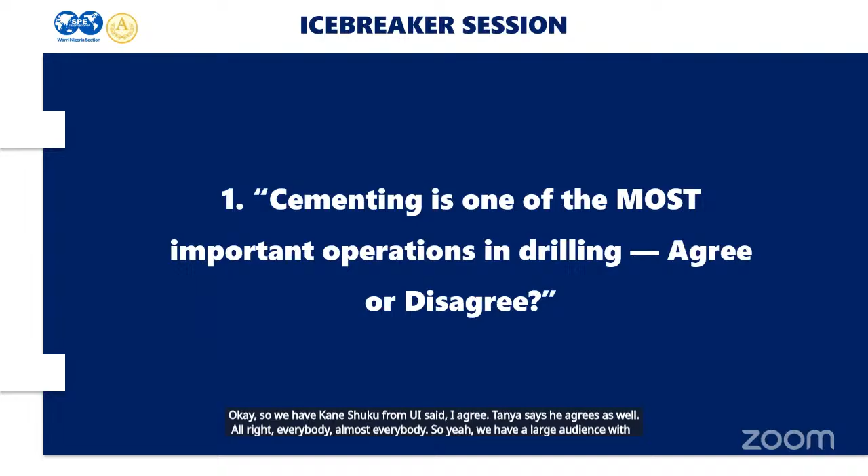Our first question: cementing is one of the most important operations in drilling, yes or no? Do you agree or disagree? Okay, we have Kene Shuku from UI saying I agree, Daniel agrees as well, and almost everybody is agreeing. So we have a large audience with the agreeing button. Let's move on to the next question.

The next question: how long do you think a cement job takes in real life? This is something I've not really thought about, probably because I've not been there. Do you think 30 minutes, 2 days, 3 days, 1 week, a month? Let me get your opinions. Nobody's responding, you're quite slow. All right, somebody said 2 days max. Daniel says less than a week, depending on the hole section. Similane said 1 and more. Better said 2 to 3 days. All right, it's like people have been on the field before, but that's fine. Let's move over to the next question.

Our third question, we have two options and you have to pick which one scares you more: cement job failure or a blowout. Earlier, Miss FJ was talking about the Deepwater Horizon incident, which was caused by a blowout. Somebody said blowout, and Callisto said A, cement job failure. Interesting that cement job failure is the one that scares you more, maybe there's something to it. We'll find out in this session. Let's move on to the next question.

All right. Good evening, everyone. I'm really excited to be here with you guys. I will just run through fundamentals of cementing from theory to field application. My learning objective for this presentation is very simple. Since we are talking about fundamentals of cement, everything I'm going to be saying will be limited to primary cementing operation, from pilot test in the lab straight to operations on the rig site. I believe you guys will gain value from this presentation.

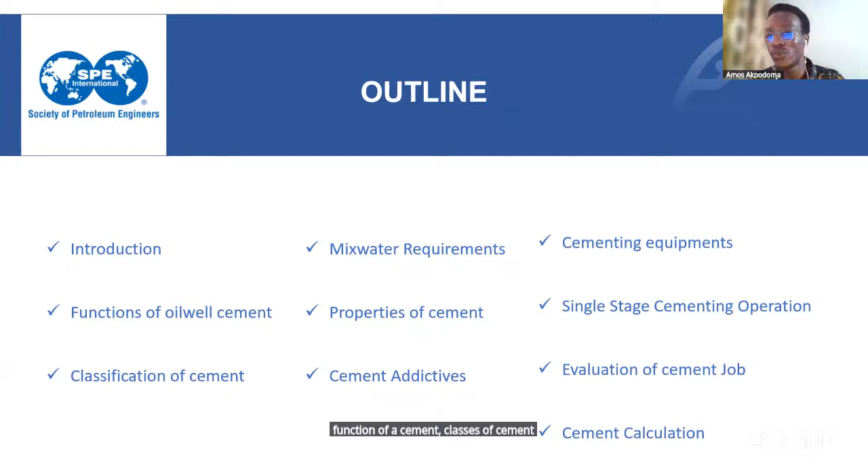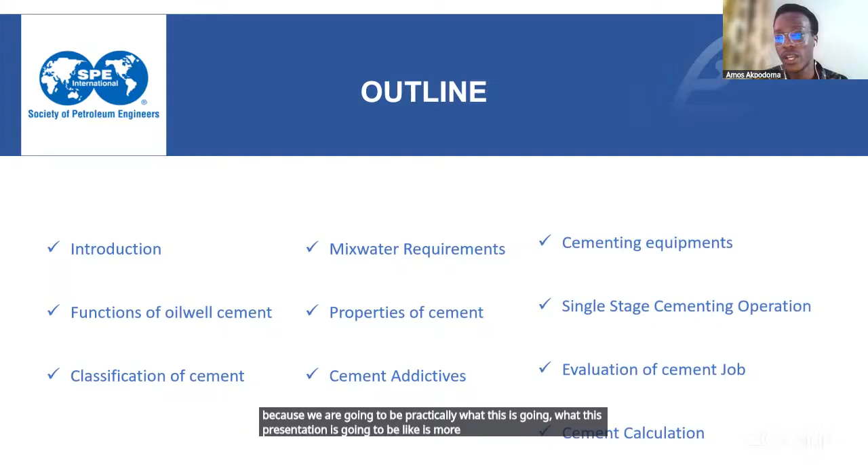So here's my outline for this presentation. I'll take you through introduction, function of cement, classes of cement, and then wrap it up with cementing calculations. I believe most people on this call are students, so please get your calculator handy. When we get to the calculation we'll do a little exercise, since this presentation is designed more like engineers designing slurry for a cementing operation.

So, what is a cement? I can't really see the chat box. Can someone unmute themselves and tell me what a cement is, please?

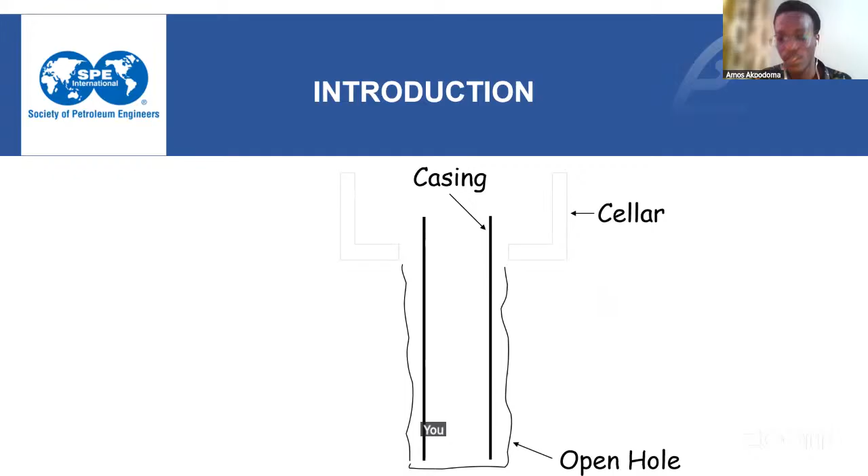So after running your casing, what's next? You cement. So these three things I just showed you - the drilling for the open hole, then the casing, and cementing - is practically the description of everything we do on the well site. The other things that come in are probably formation evaluation; you want to evaluate the hole you've drilled, complete them, and all of that. But basically what you do in drilling is you drill, you case, and you cement, and that is all in drilling.

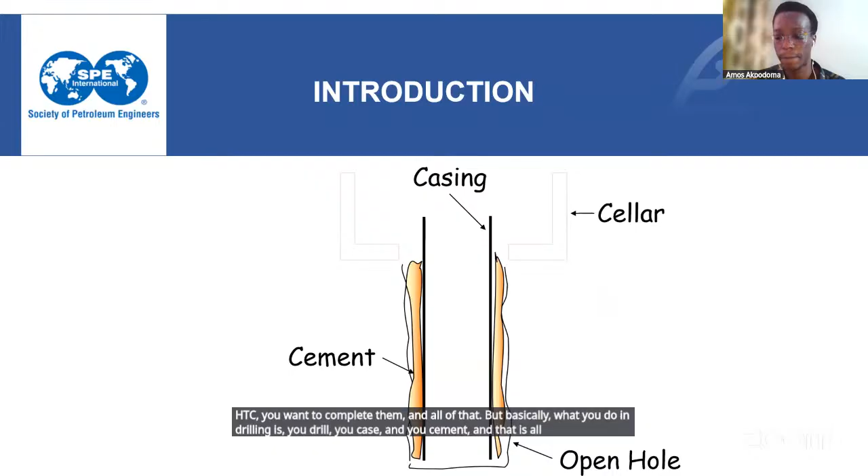So I think this falls back to our question on the icebreaker. The question was asked: what do you fear the most, a poor cement job or a blowout?

Are you guys still with me? Yes, sir, we can hear you.

All right, okay. So basically, this is what cement is. A cement is used primarily as an impermeable seal material in oil and gas well drilling. So basically, like the schematic I showed earlier, one of the most widely used applications of cement is actually to bond the casing to the formation. It's that simple. I'm trying to be as simple as possible in my explanation.

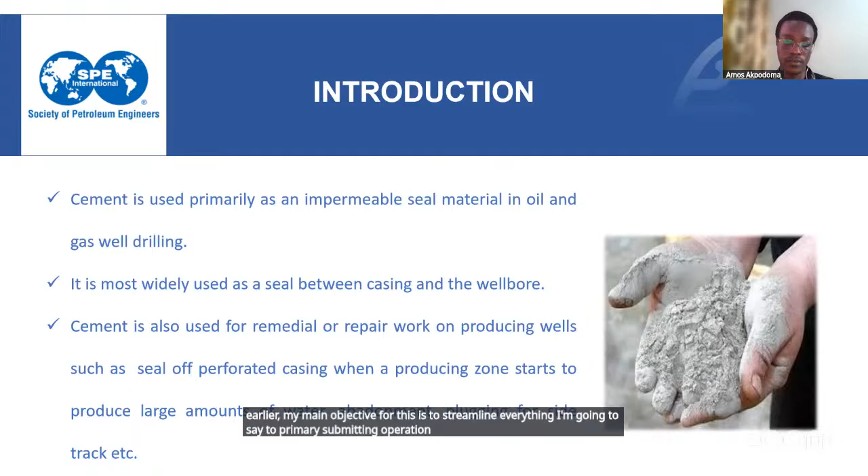The most important function of a cement is not actually to prevent caving in, like we all learn in school - caving in, isolate, hold the casing and all of that. That's not the, should I use the word, primary function of a cement. We should know this as a rule of thumb. The primary function of a cement is to actually restrict fluid movement between formations. You don't want a cross flow of fluid in your formation. This can lead to channeling, blowout, etc. So that's just the major, primary function of cementing.

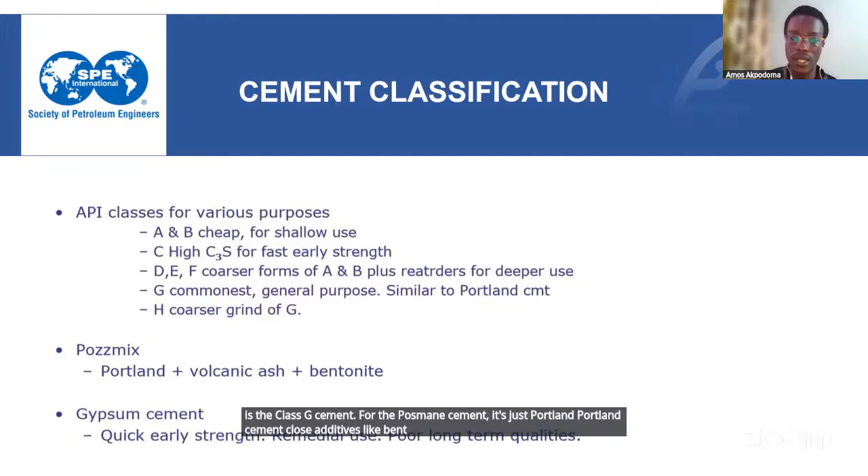All right, so we'll be moving to the cement slurry, how cement slurries are actually designed. First off, we already know what a cement is already, like Daniel helped us to define. We already know a cement is just a fine particle made from limestone, shale, what not.

So how do we design a cement slurry? First off, I said we already picked the type of cement we are going to use, which is class G, that's the most common cement. So if we are designing a cement slurry, we already know we're picking a class G API standard cement.

So first off, we'll be talking about the mixed water, the cement mixed water. So what is cement mixed water? It's already here, so mixed water is the water that is used to make up the cement. It's more like, I think it's self-explanatory. If you want to mold a block, the water you use to prepare your cement, make your cement, mix your cement, that is the mixed water.

There's no big English to it. That's why I said drilling engineering is one of the simplest forms of petroleum engineering. It's one of the simplest disciplines in petroleum engineering.

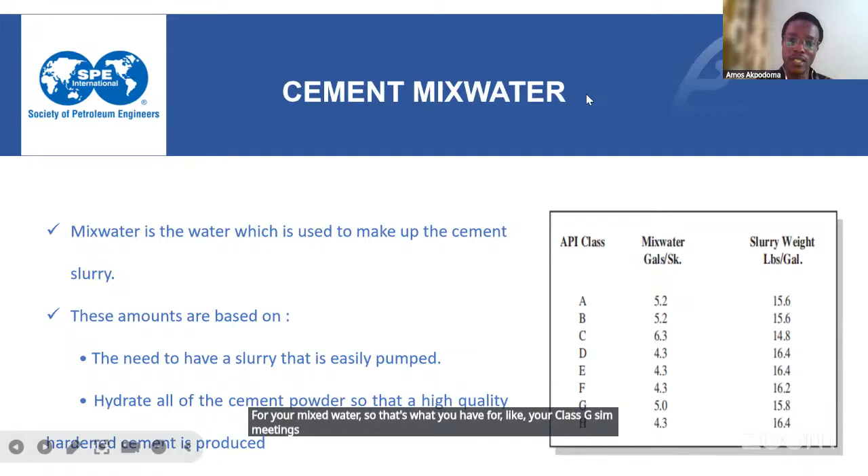So moving on, still on the mixed water, the amount of mixed water used to make up the cement slurry is carefully controlled. Like I said earlier, you want to design a cement slurry that you can easily pump and that won't set in while you are pumping. So it says that if the mixed water is too much, your cement will not set very strong.

Like for those of us that have experience with or have seen people molding blocks, if there's too much water in your cement mixture with your sand and all of that, you will not have a very solid block.

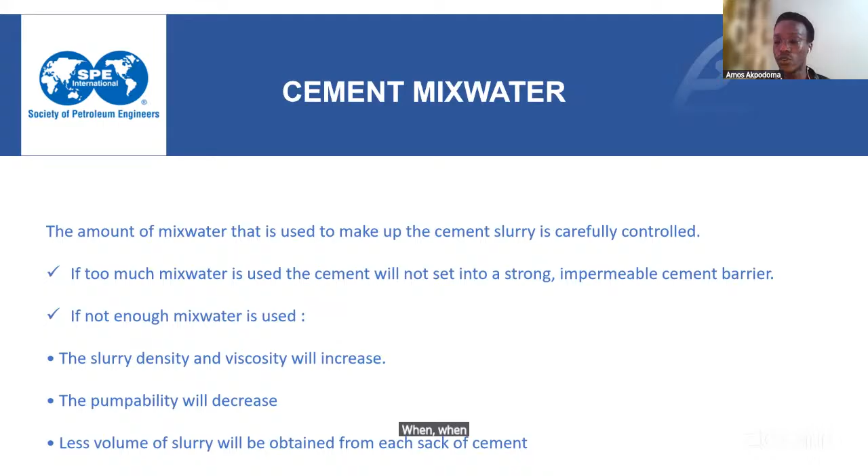And if you do not put enough water for the cement slurry, you see the cement density will be high. It's more like when you don't have enough water for block molding, the thickness will be very high because density is more like the thickness now. And if your density is so high, you cannot pump it. So you have to be very, very careful when mixing your cement slurry with your mixed water.

All right, a minute. I want to bring in a fluid engineer that works in a lab and understands the properties of cement, what they measure in the lab. I want to bring her in to talk about the properties of cement for a while, then I will continue after she's done. Please, Oghenefejiro Golagha, if you're on the call, please go ahead and give a breakdown of how cement comes into your lab, the kind of tests you guys run, just for the students to understand the properties we look for in a cement slurry.

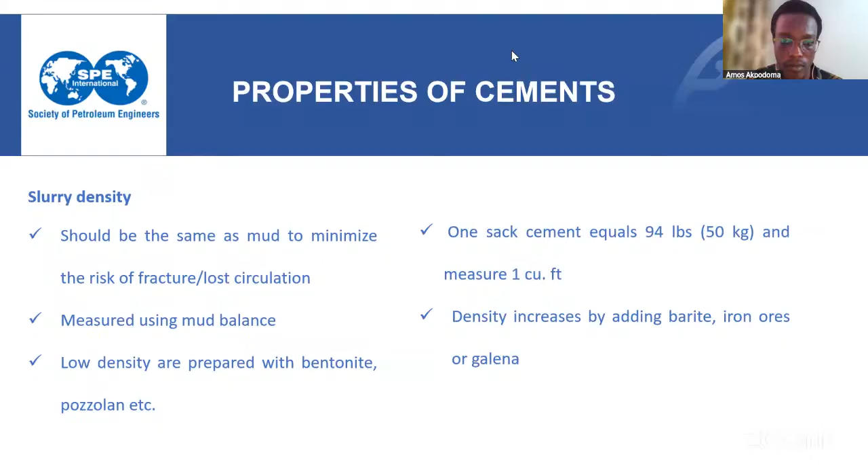Okay, good evening, everyone. Please confirm you can hear me.

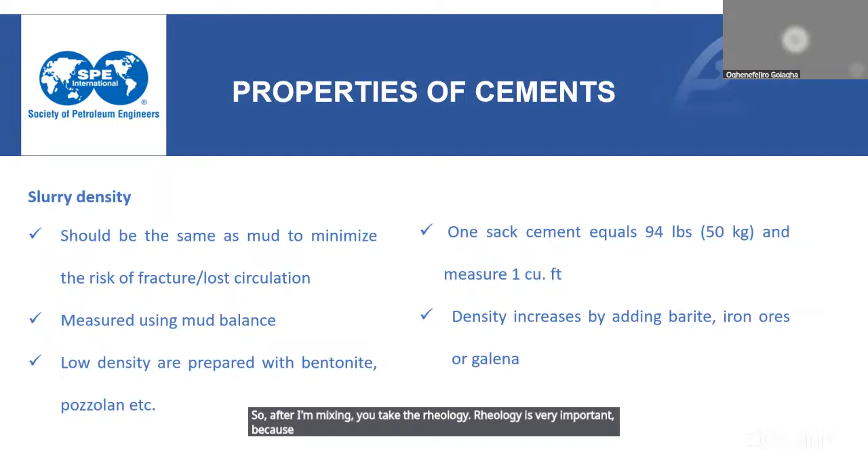After mixing, you take the rheology. Rheology is very important because if you don't know the properties of your fluid in terms of its plastic viscosity, in terms of yield point, how long this cement can withhold - one of the properties I'm trying to compare it to is drilling fluid.

One property of drilling fluid, which is the mud, is to bring cuttings to the surface and also to hold cuttings in terms of, let's say, a changeover at the rig. It's the same thing the slurry is doing. So the slurry should be good in terms of rheological properties, in terms of gel strength, because once you're pumping and at a point you need to stop, will the cement be able to bounce back by the time you resume pumping?

By the time you put on your pump, will the cement still be able to pump? So after mixing, you take the rheology. After the rheology, if you notice that the density of the slurry is too viscous to flow, you redesign again to make sure that the slurry is pumpable. We don't want to pump slurry where the pump will be cavitating or going through a lot of stress to pump a job.

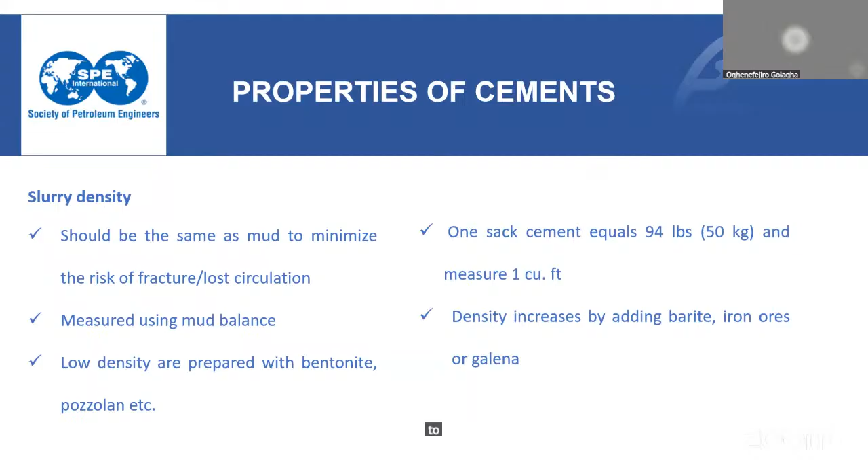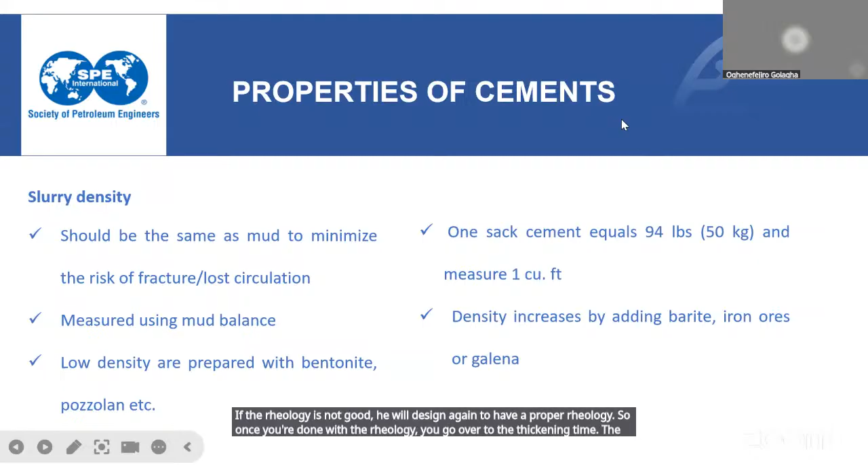Like I'm doing a flow chart - if the rheology is not good, they redesign again to have a proper rheology. Once you're done with the rheology, you go over to the thickening time. The thickening time is one of the most paramount tests we run in a cement job because we want to know how much time it will take for the cement to set.

We don't want to be pumping a job and all of a sudden notice that the pressure is building up, observing that the cement has set in your casing. Cement slurry is supposed not to set in your casing - it's supposed to set in the annulus between the casing and the wellbore. So any cement job where the cement sets inside the casing's inner diameter means you must have gotten a CLIP - cement left in pipe.

And that will lead to a lot of issues. You may want to look for how to break that cement before you continue your job, or you now have to do a remedial job by plugging that well. Then finally, the thickening time, like I said, is to know when it will stop pumping.

And we measure that in Bearden units of consistency, known as the BC. So for a tail slurry, it's higher in density with a lot of cement quantity, usually 70 BC and above. While a lead slurry is lighter in density and also in terms of cement concentration, it's about the POD, point of departure.

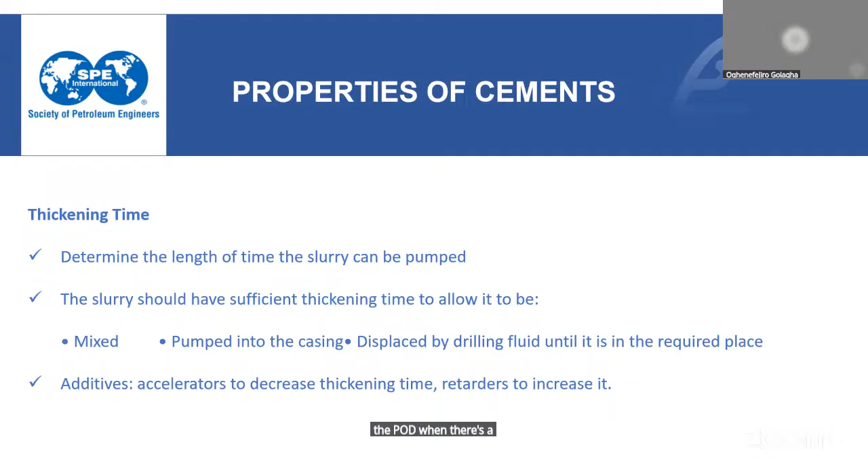After the thickening time, you may want to do compressive strength testing, and the compressive strength tells you how much that cement can withhold stress. It's usually 50 to 500 psi and also above 500 psi. So a good cement slurry should give you a reasonable compressive strength within 24 hours.

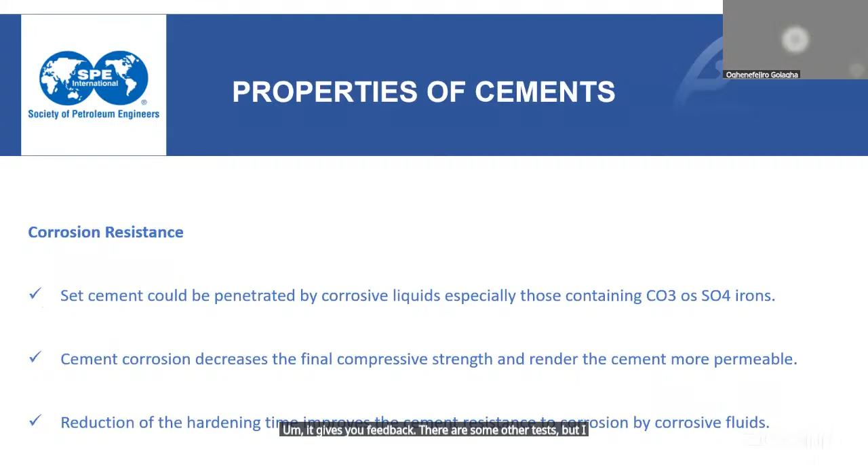And finally, you share your results with your client. If the client is okay with it, they give you feedback. There are some other tests, but I will not go into details. If it's not okay, you redesign and start the process all over again. At this point, thank you very much.

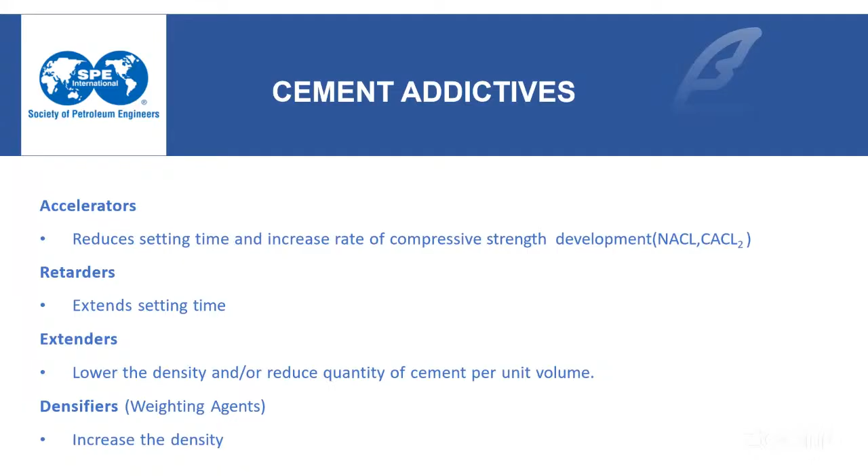All right, so Golagha just did justice to what happens in the lab. After all these designs are done, your additives - these are some of your additives. For knowledge sake, you have your accelerator, your retarder, extender, densifier. I'm just trying to rush this presentation. So for your accelerator, just know your accelerators reduce the setting time.

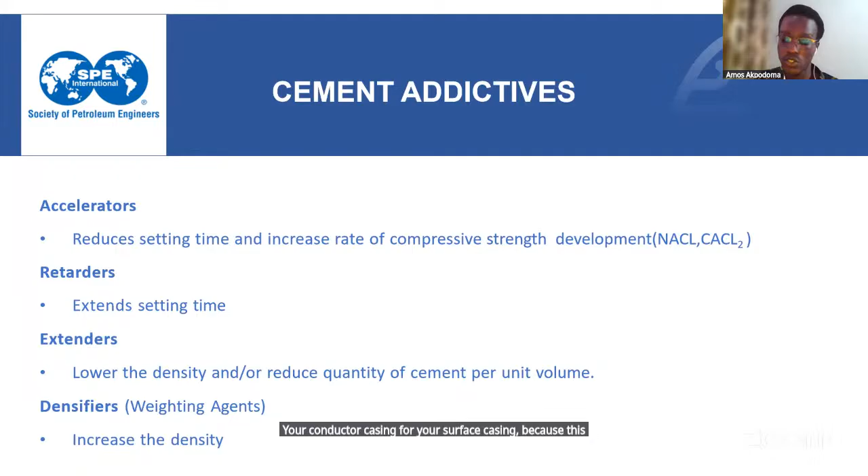For your retarders, they extend the setting time. So most times for the accelerators on the field, you add accelerators to your cement slurry for your conductor casing, for your surface casing, because these casings, this whole section, they are not deep, they are shallow hole. So temperature is not usually very high there. But for deeper wells with higher temperature, you want to add additives such as retarders and all of that. So extenders is just for you to reduce your density of your slurry.

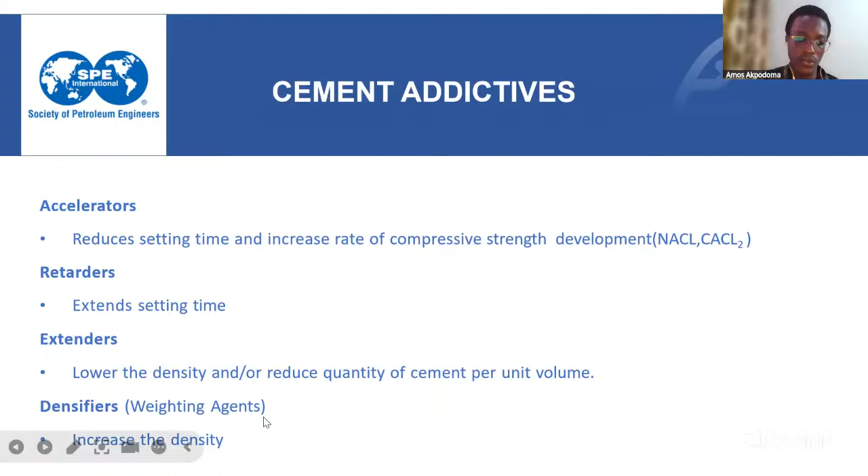You can use your slurry - for this, most of the time you use a barite. So you have your dispersant and other additives such as the defoamers to remove foams and gas bubbles, LCM for loss circulation and all of that.

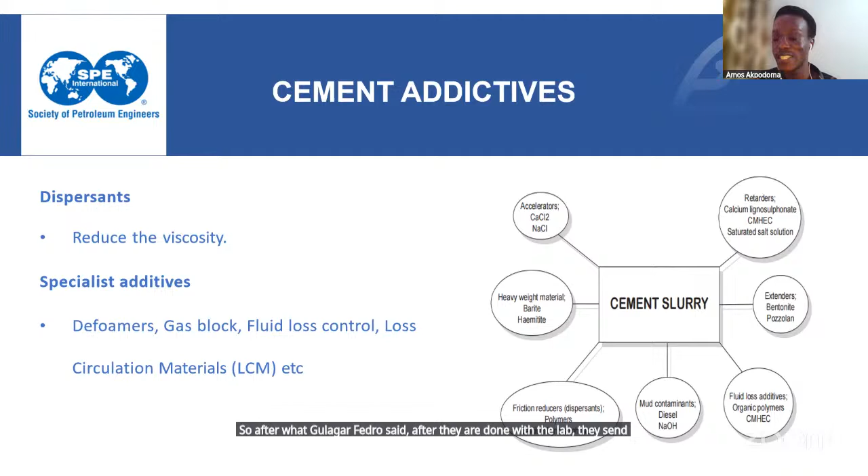So basically this is cement slurry. This is what your cement slurry will look like. Your cement slurry is your cement plus your mixed water plus your additives. So after, like what Golagha Fejiro said, after they are done with the lab, they send this cement to us as a blend in the well site, and this is where we actually come in.

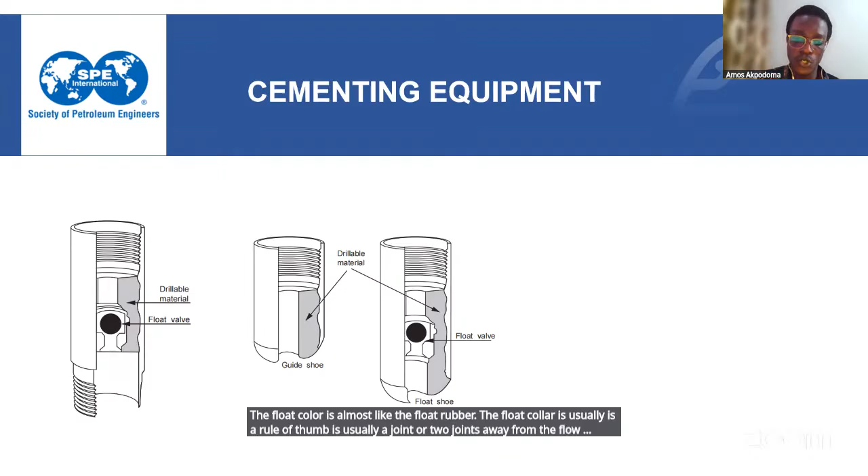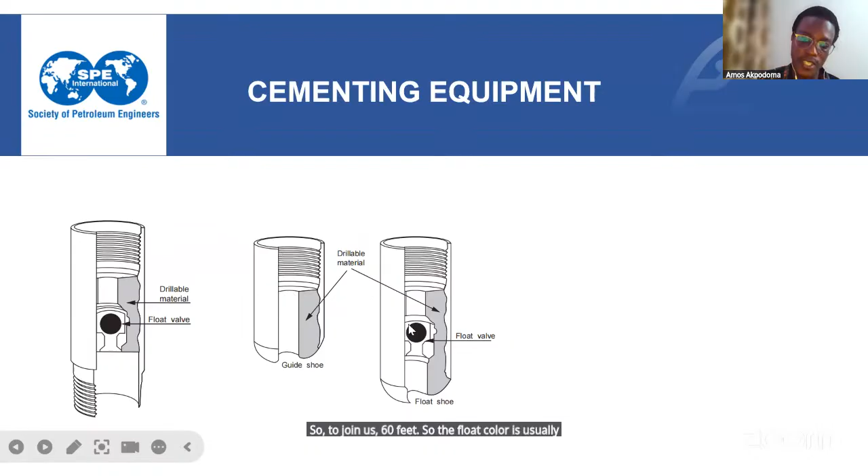We also have, okay, if you can see this diagram here, this is a representation of what it looks like in the wellbore when your casing and your cementing accessories are already in the wellbore.

So this first one here, if you can see my console, this is the guide shoe, or the float shoe. Most of the time in my own experience, we have always been using the float shoe. The distance between this float shoe and the float collar is what we call the shoe joint.

So you should know your casing, your slurry that you are designing in the lab that you are taking to the rig site, is going to fill your annulus and your shoe track. So you should know that your cement is going to be first in your annulus, and then a part of it will also be in your shoe track.

So this is the float collar here. These are bottom plug, our top plug. This you are seeing here is a centralizer. I think I have a photo of the centralizer.

So these are our plug, top and bottom plug. Our top plug is a solid core, solid from the top to the bottom. While for the bottom plug, it has a hole, and then a disc. This disc can be ruptured with pressure. When you apply pressure, that disc can break. I will explain the sequence later in this presentation.

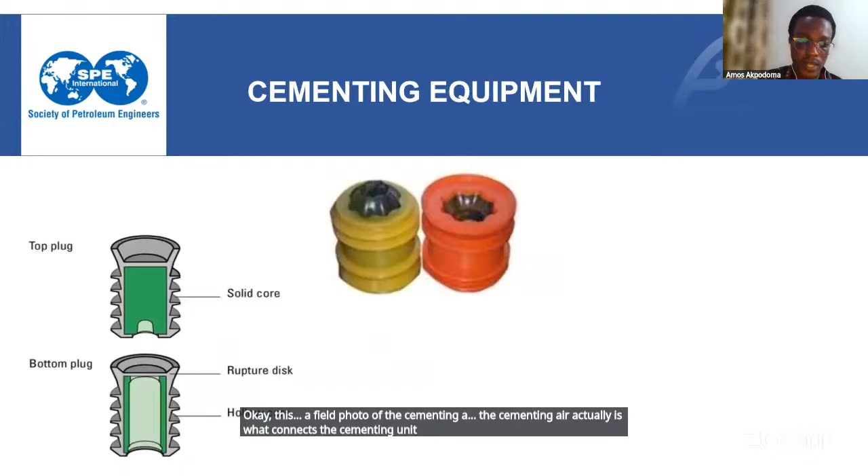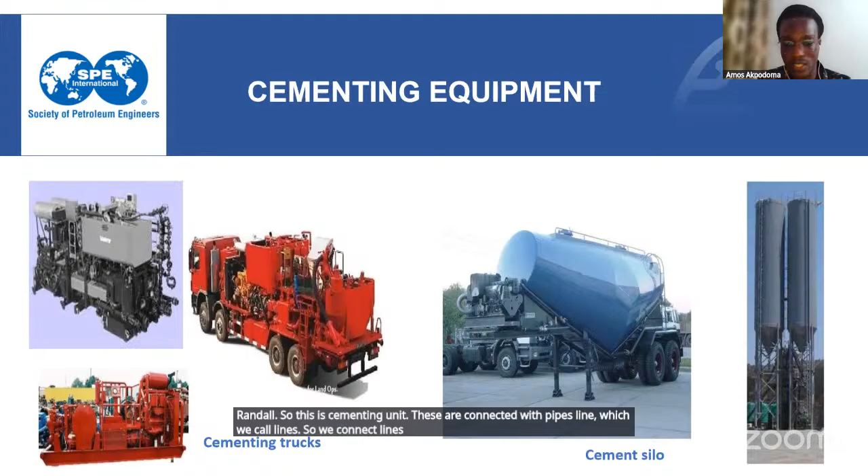To the cementing head. And also our plugs, our top and bottom plug, are usually secured in the cementing head. I will explain the sequence later.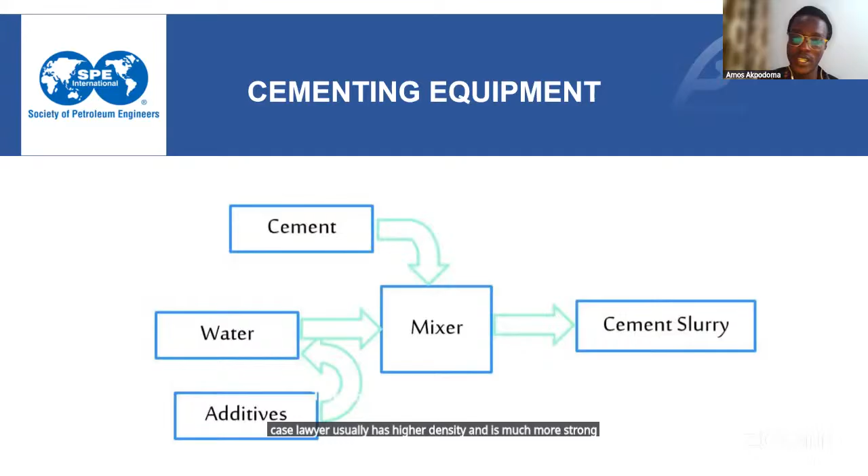So like I said earlier, cement slurry, this is how you design your cement slurry. The main thing is just cement, water, additives, you mix them together and then you get your cement slurry. We should understand that in operations, there are two types of cement slurry: the tail slurry and the lead slurry. Tail slurry usually has higher density and is much stronger than the lead slurry. So you can call the tail slurry the strong cement, while the lead slurry you can call the weak cement.

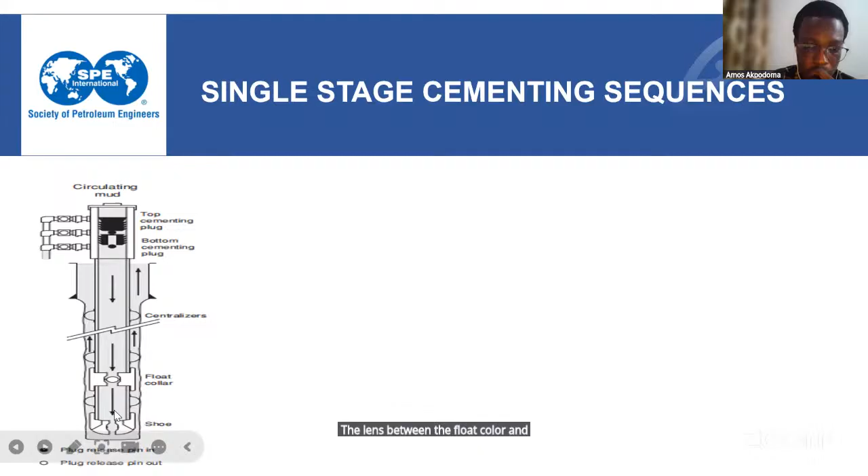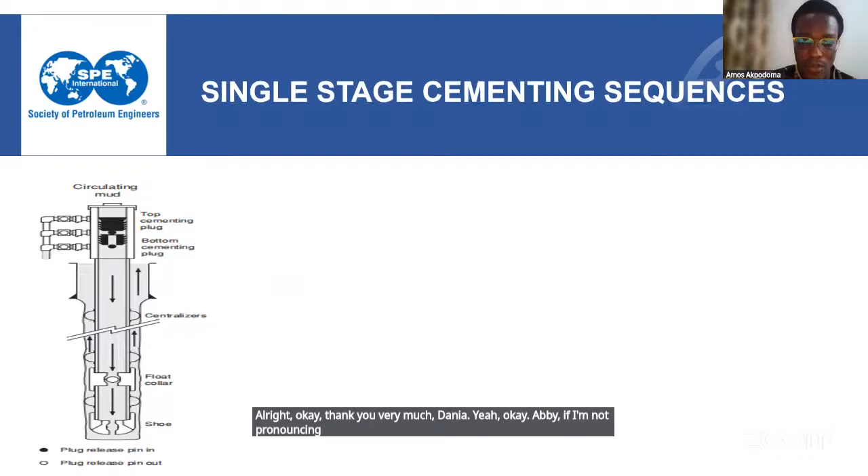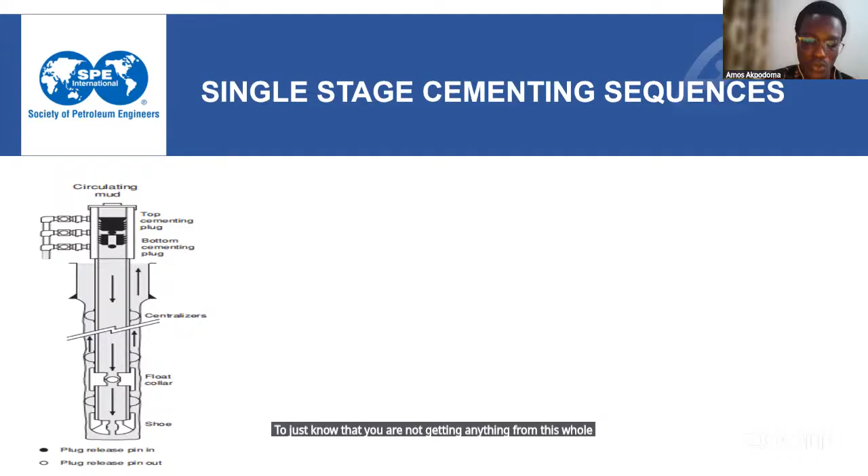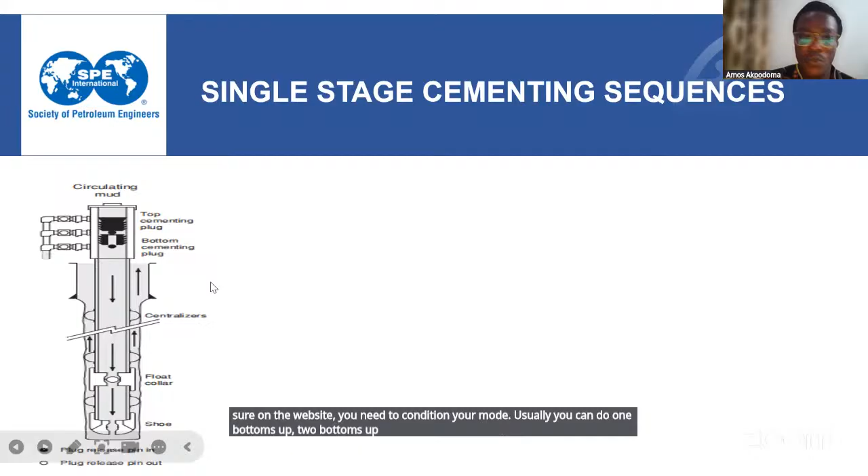Before we commence the cementing sequence, before we commence cementing, first off we need to make sure you condition your mud. Usually you can do 1 bottoms up or 2 bottoms up. By that I mean you just circulate your mud from bottoms up once or twice. If you do it twice, that's 2 bottoms up. So you condition your mud to be clean, make sure your hole is clean and all of that. You don't want any contamination to your cement.

So those are very important, because if you have contaminated cement, you have a poor cement job. If you have a poor cement job, there's high risk of channeling. High risk of channeling can lead to a blowout, etc.

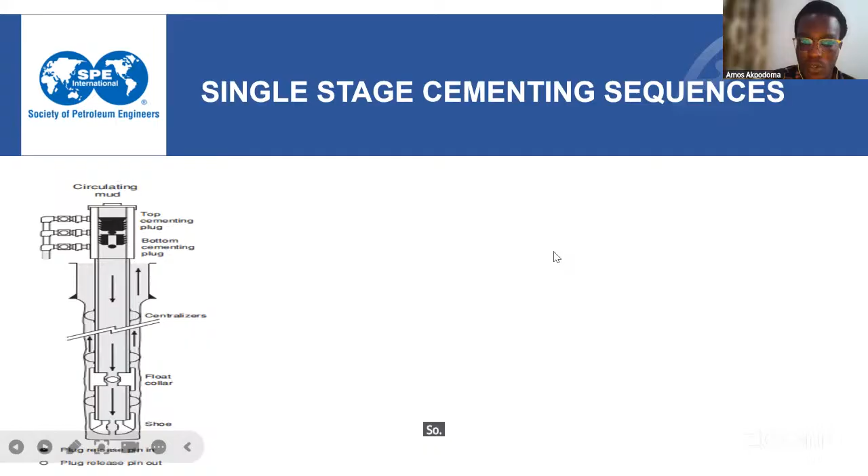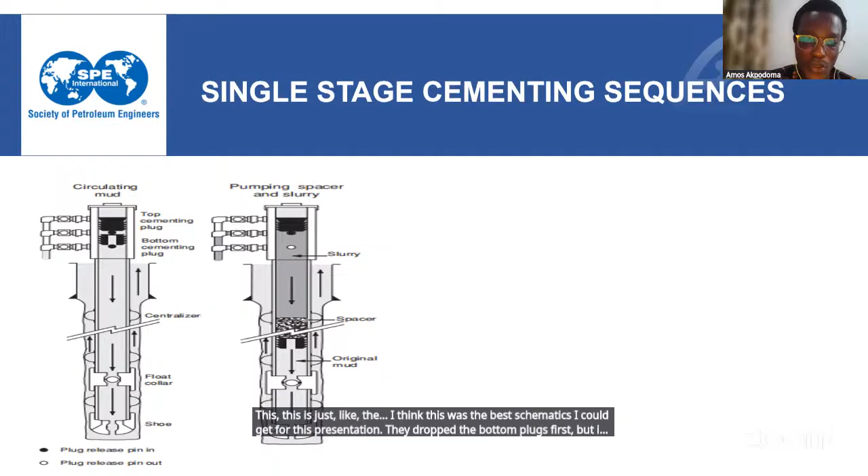So next up, on these schematics here, if you guys look at them, what they did first was drop the bottom plug. This was the best schematics I could get for this presentation. They dropped the bottom plug first, but in my own rig, the way we work, we usually pump. This is not to say it's wrong, there are a lot of different ways people do cementing operations, but for us, we pump in our spacer first.

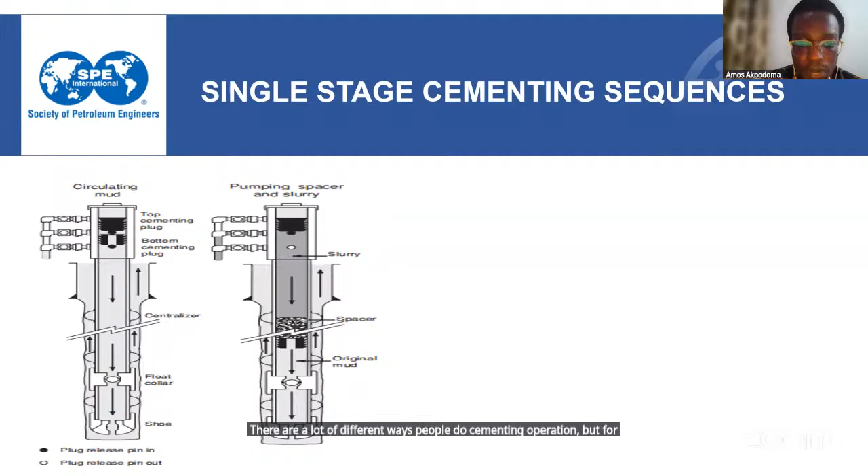Yes, this is our spacer fluid. You can call it spacer fluid or pre-flush. That is, you want to flush the casing first to remove every form of mud. You don't want your cement to be mixed with your mud, so that's why we pump our spacer first. I'm using my experience of cementing to do this lecture, I'm not following the way it is here. So we'll pump our spacer first.

So like I said earlier, there are 2 types of cement we usually use in the industry, which is the tail and the lead slurry. So before I continue, I want someone to guess. Which do you think they pump first, this tail slurry or the lead slurry? Like I said earlier, the lead slurry is the weak cement, while the tail slurry is the stronger cement, it has higher density. So in your own opinion, which do you think you pump first?

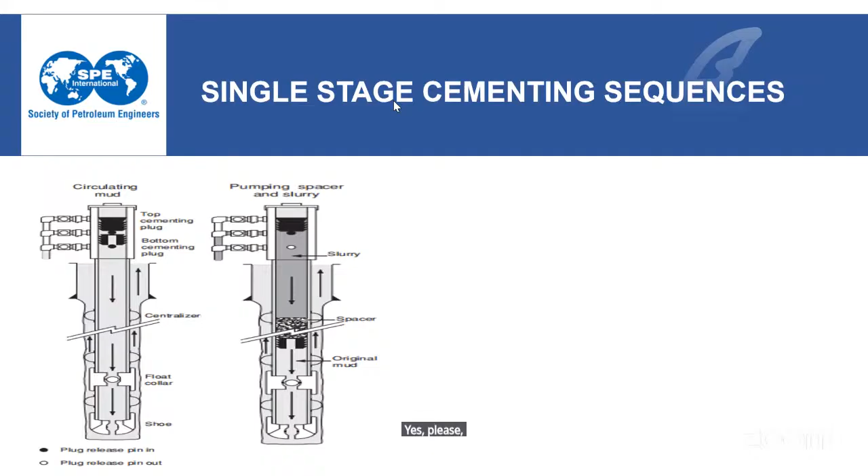Miss Juliana, your hand is raised, please, you want to say something? Yes, please. For the sake of time, you have like 5 minutes more. Thank you very much, all right, okay, thank you very much. So you see, I need to be quite fast.

So you pump in your lead slurry. After pumping your lead slurry, you go with your tail slurry. So everything here, you assume this is your lead plus your tail slurry. So when you're done with that, you drop your top plug.

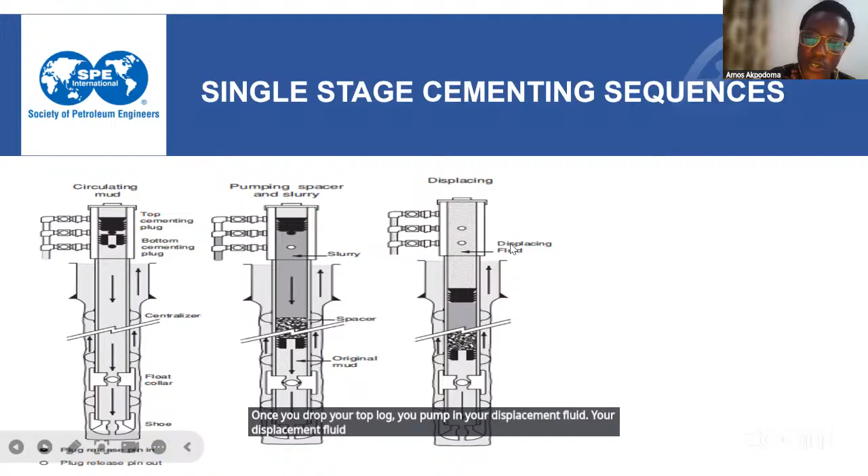Once you drop your top plug, you pump in your displacement fluid. Most of the time on the rig, we use a normal drilling mud as displacement fluid. What does it do? Like the name implies, it's very simple - it displaces the cement from the casing into the shoe joint, down inside the annulus. So we just keep displacing until the top plug meets with the bottom plug.

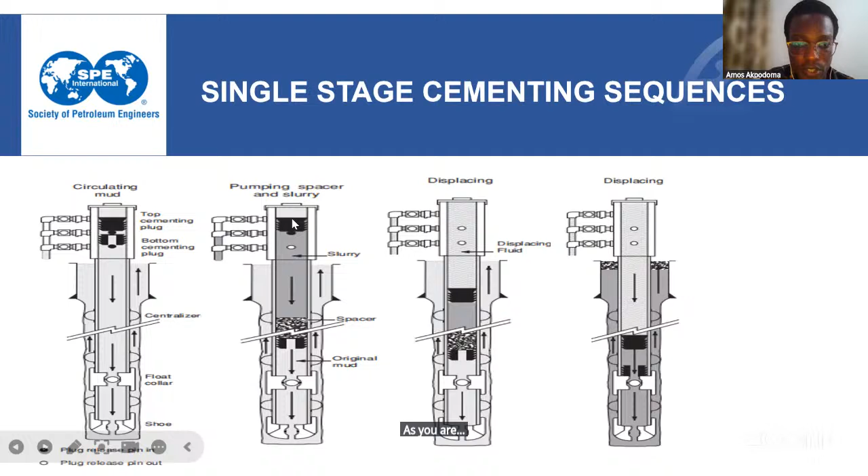I think I missed something about the rupture discs for the bottom plug. As you are pumping in, displacing and pushing down your top plug, the pressure will rupture this bottom plug's rupture disc, so that your cement can go through. So for your top plug, you just displace with your top plug.

When your top plug meets your bottom plug, that's what we call bumping in cementing operations - we've bumped our plug. If we have a successful cement job, our cement is now in our shoe track and in the annulus. So that's basically everything we do in a cementing operation.

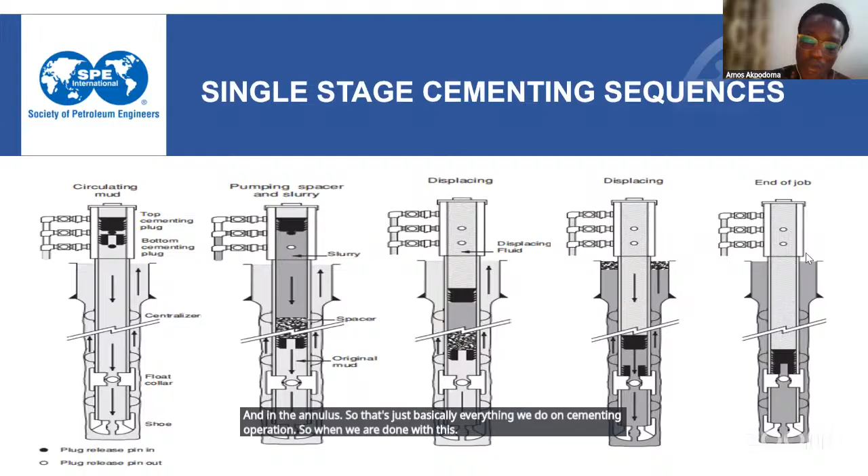So when we are done with this, we wait on cement. While we are waiting on cement, we do some wellhead operations and all of that. I'm trying to be very fast. After wait on cement, you can pressure test your casing, etc.

Then to evaluate our cement, we do a cement bond log. If you watch the Deepwater Horizon movie, you hear them talking about cement bond log. It's just to evaluate the bonding of the cement, to know the integrity of the cement job you just did. So the cement bond log - the CBL and the VDL logs are run together on the field.

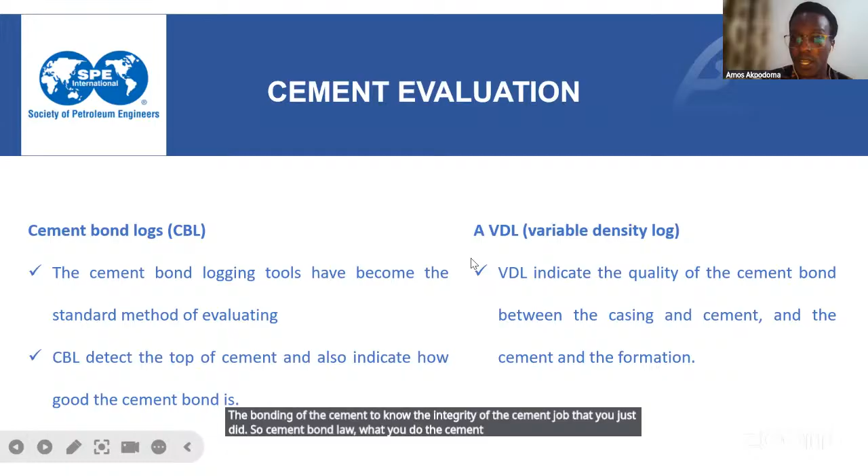Since I have 5 more minutes, I wanted us to do a little calculation. That might not be possible, but again, when we are designing our cement, we shouldn't just go to the field and start pumping cement.

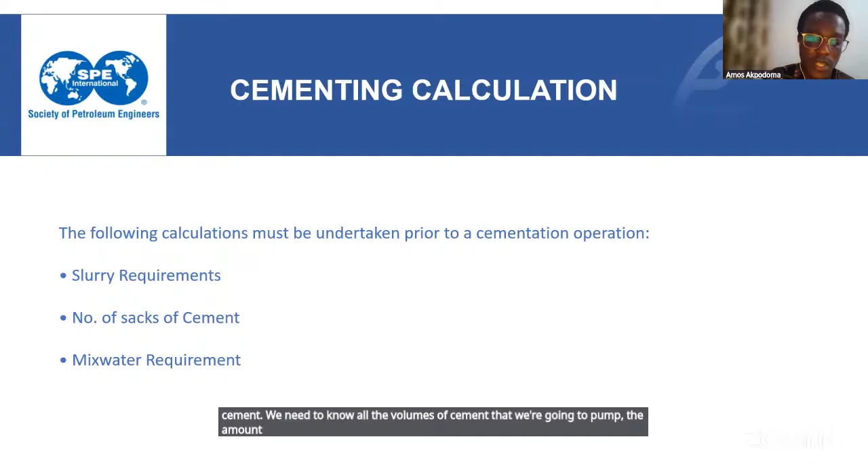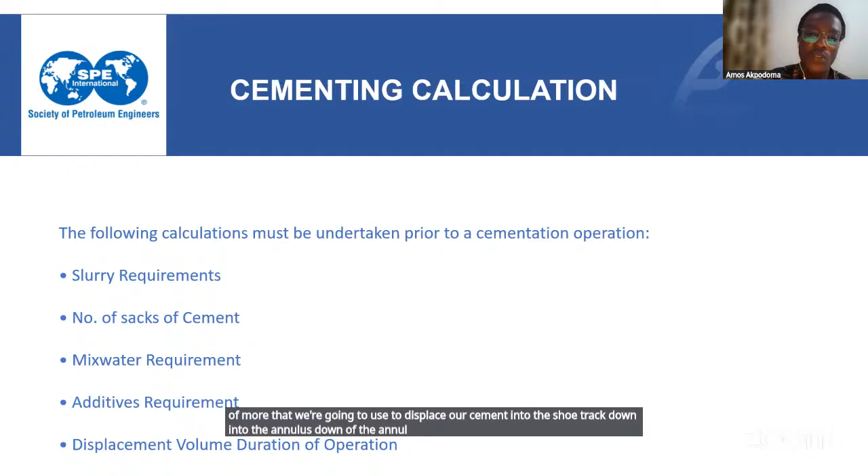We need to know the volumes of cement we're going to pump, the amount of sacks of cement we're going to use, the mixed water to mix those sacks of cement, the additives we're going to add, and all of that. Even for displacement, we need to know the volume of mud we're going to use to displace our cement into the shoe track, down into the annulus, and up the annulus. So all of these are calculations you do prior to even going to the field.

I'll show you guys the formulas you're probably familiar with. For the cement slurry requirement, we need to calculate for the cement in the shoe track. We want our cement placed in the shoe track and then inside the annulus. I will talk about this rat hole and show you guys the rat hole with a schematic.

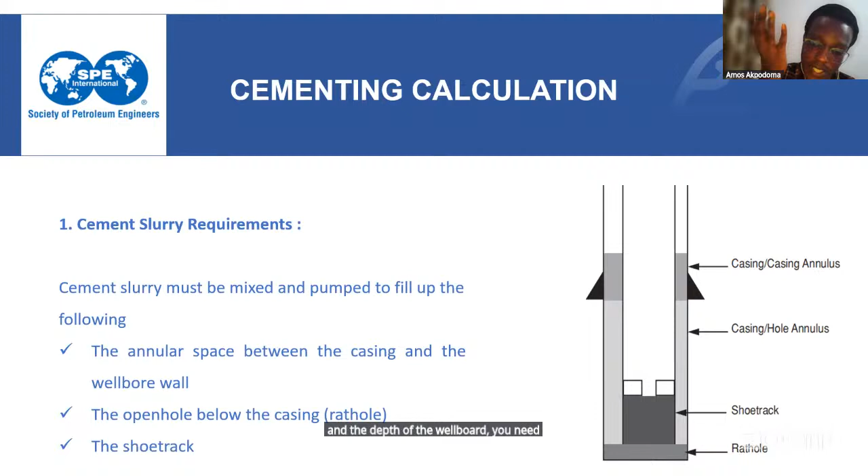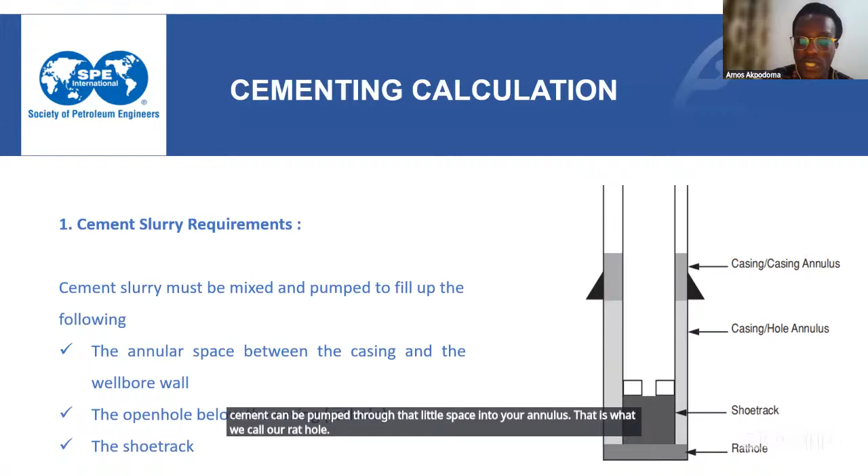Okay, if you can see the schematic here - we already know what a shoe track is. The space between the float shoe or guide shoe and the depth of the wellbore, you need to give a little space so that your cement can be pumped through that little space into your annulus. That is what we call our rat hole. So we should know this is a rat hole in cementing operations.

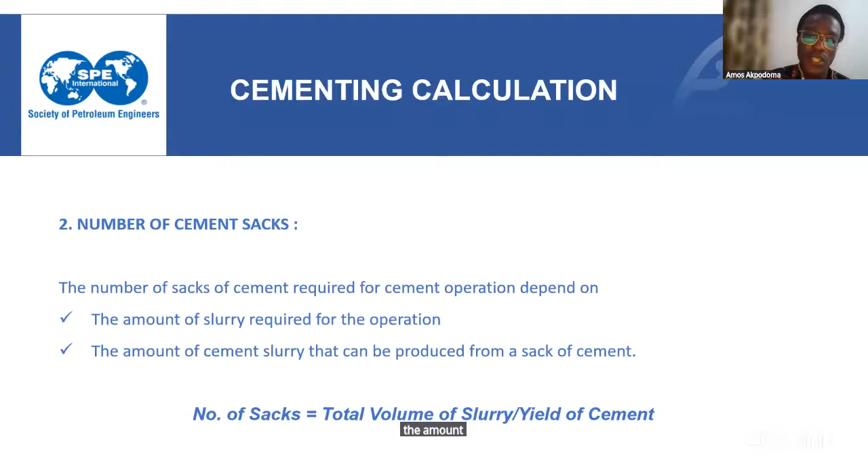Again, we need to know the number of cement sacks we're going to use. This is the formula for calculating it: the total volume of cement divided by the yield of the cement. That's the total volume of cement you've calculated to pump for that cement job, divided by the yield - the yield being the amount of cement you can get from each sack.

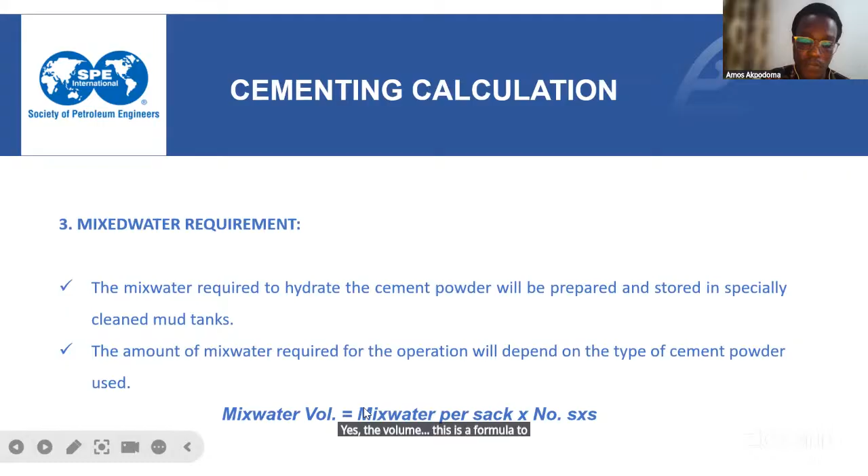That's just it. For the mixed water requirement, there's an API mixed water requirement. This is the formula to calculate the volume of mixed water: mixed water per sack times the number of sacks.

We need to know our additives - this is also the formula for our additives. We should know, as a rule of thumb, a sack of cement weighs 94 pounds. Just know that as a rule of thumb.

Most of all these calculations, there's a red book - this is a Halliburton cementing book. There's a blue book, the SLB book, and a green book that you can get all of these from, basically without much calculation.

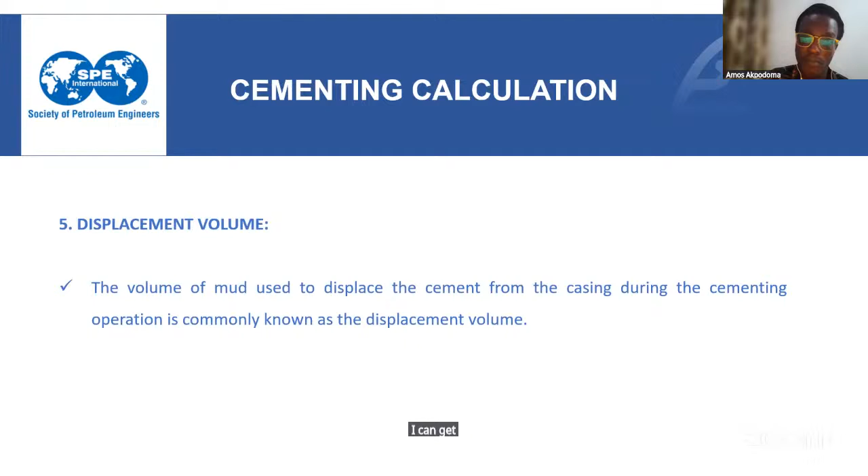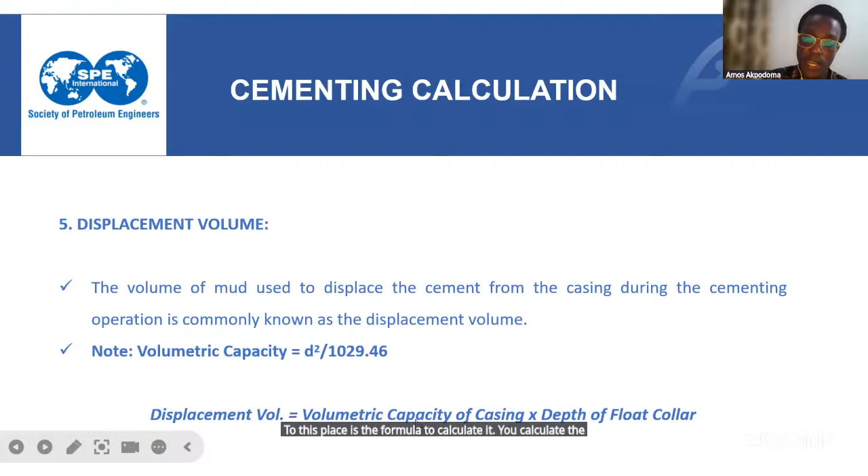So this is how to calculate our displacement volume. If you want to know the volumes of mud that you are going to pump to displace the cement, this is the formula to calculate it. You calculate the capacity and then multiply it by the depth, the length.

Okay, I can even see someone asking, can you enlighten us a little on the cementing calculation? All right guys, so I'm still going to rush this. If you don't understand it, you can reach out to me on my personal DM. You can reach out to Juliana, she'll give you my contact, and then probably I'll just explain this little calculation. It's a very simple calculation.

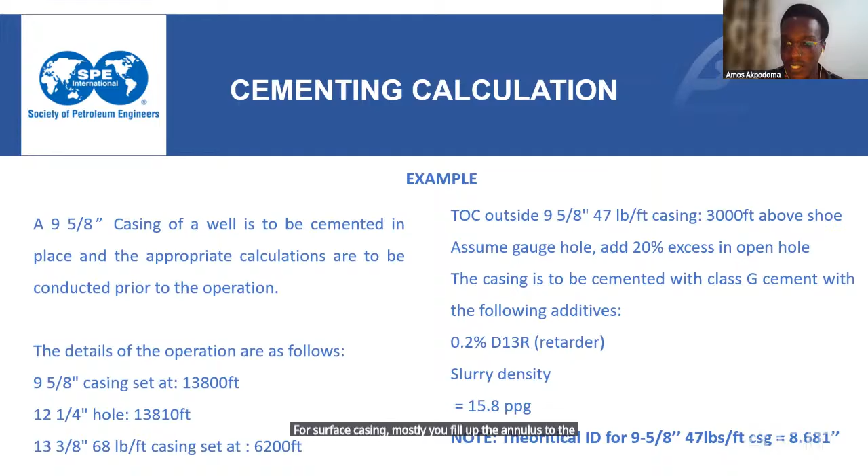And again, for this top of cement, I know there might not be enough time to ask questions. The major reason why they're saying our top of cement is going to be 3,000 feet above, and not come up to the surface, is because, as a rule of thumb, for surface casing mostly you fill up the annulus to the surface with cement. But for production casing and intermediate casing, most of the time you don't fill them up to the surface, because it's going to cost you and all of that.

Basically the major reason why for surface casing they fill up the annulus to the surface is because of the weight that the surface casing is carrying, the weight from the BOP and the wellhead. You don't want your casing to be buckled from all this weight, the axial load resting on the casing. So that's why you just fill it up, and that's it. I just hope you guys got that. I'm just trying to be very, very fast.

I want to see if... okay, it's not here. If someone can tell me why our float collar is at 13,740 feet? I think this will be the last question I'll ask, then I'll just be rushing through the rest.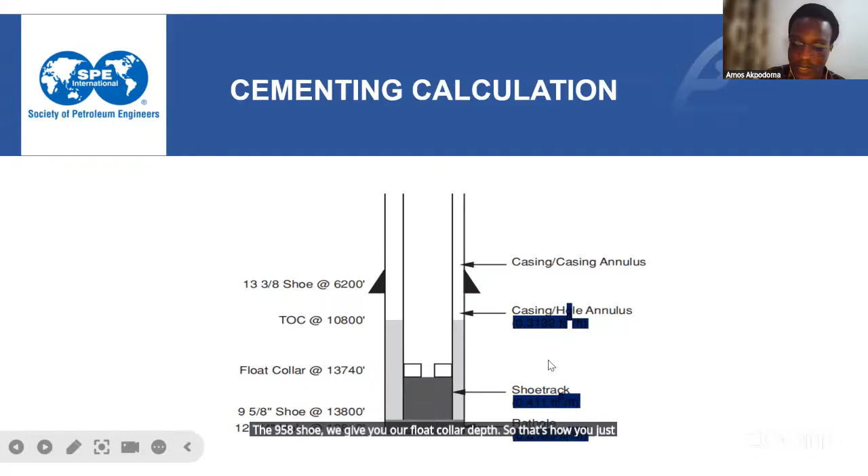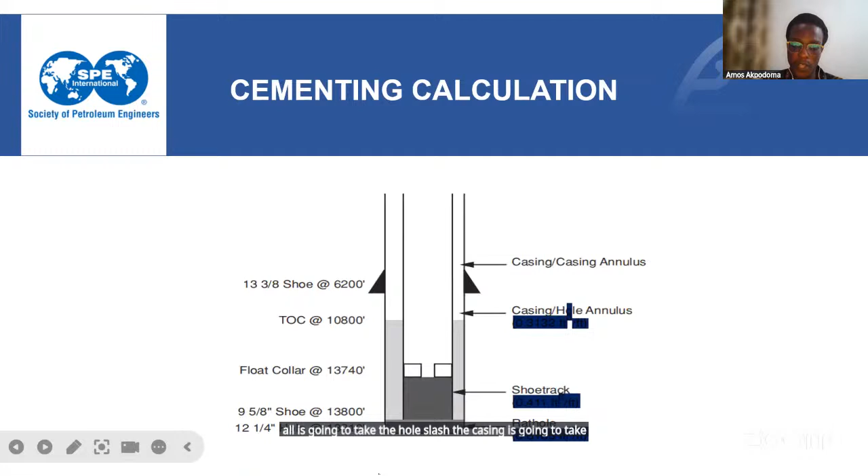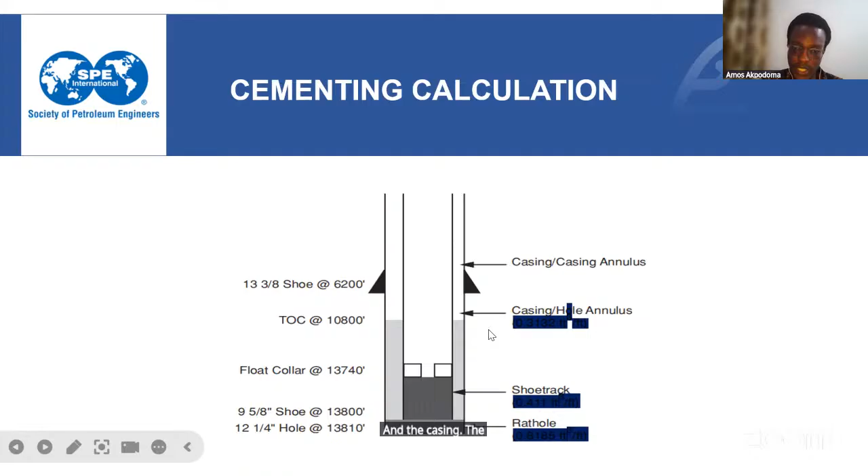Let me rush through this. The first calculation we're going to make is we want to calculate the volume the hole/casing is going to take. First off, we want to calculate the volume of this annulus of the open hole, the outer diameter of the casing and the inner diameter of the open hole, so we can calculate the volume of cement that it can take.

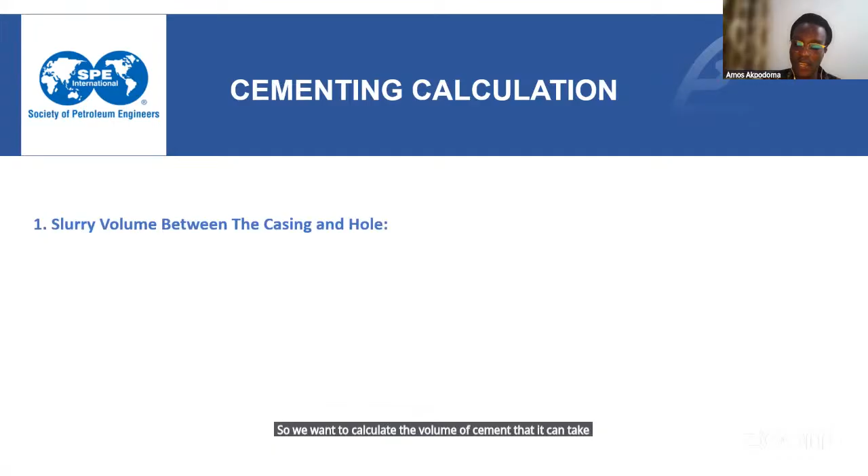So like I said earlier, I know a lot of us might not catch up easily. If you can't catch up easily, just reach out to me. I will do the little explanation I can over DM.

First off, you want to know the capacity of the open hole between the casing and the open hole. You want to know the capacity. And what's the formula for the capacity? If you have a pen, you can write it down. I'm giving you guys 30 seconds to get a pen, or if you have something on your phone, you can write it.

The formula for calculating capacity is OD squared minus ID squared, over 1029.4. Let me repeat myself: OD squared minus ID squared, over 1029.4.

So we already know our OD, which is the inner diameter of the hole, is 12.25, so 12.25 squared, minus the outer diameter of the casing, which is 9 5/8 — that's 9.625 if I'm not mistaken — squared, divided by 1029.4. We are going to get this.

If you can see my console, you are going to get 0.0558 barrels per foot. So you multiply it by the length.

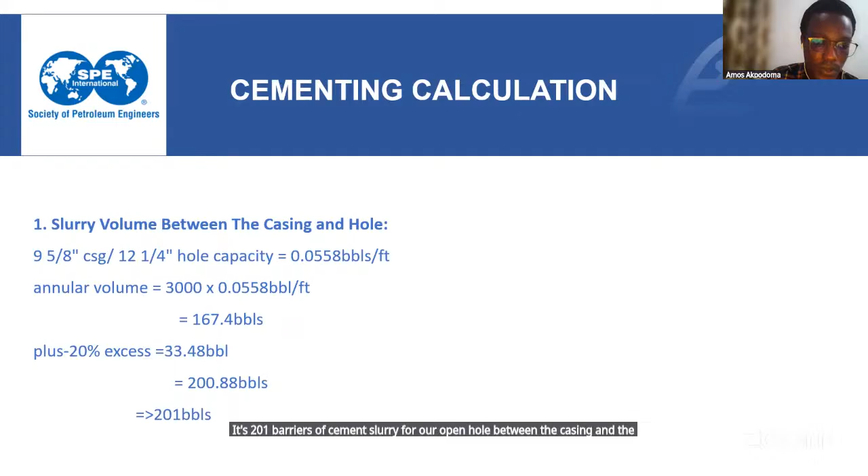So next off, we want to calculate for the shoe joints. I said earlier — Miss Juliana is already raising her hand, Miss Juliana is already raising her hand — okay Miss Juliana, just give me a minute, let me rush through this. So like I said earlier, we want to have our cement in our shoe joint and in our annulus.

So for our shoe joint, this is what we calculate for the capacity of the ID of the casing. And if you calculate, this is a theoretical ID — if you look at your red book and your blue book, you are going to see it there. So basically, this is what you are going to get for the barrels of slurry for your shoe joint.

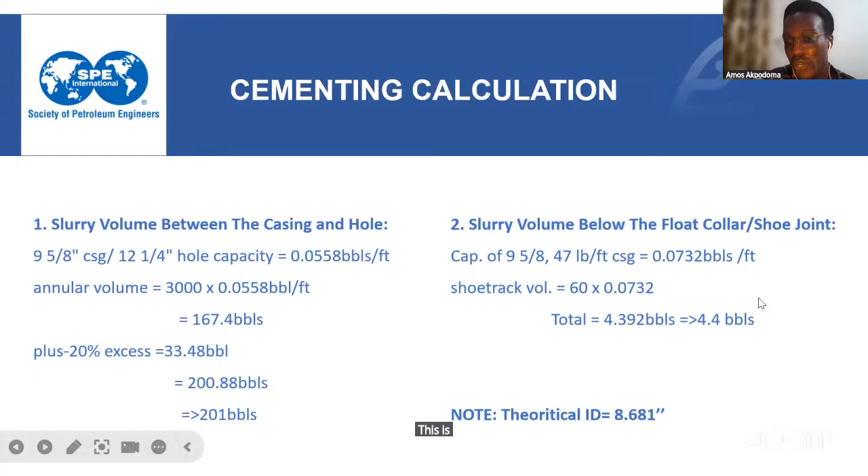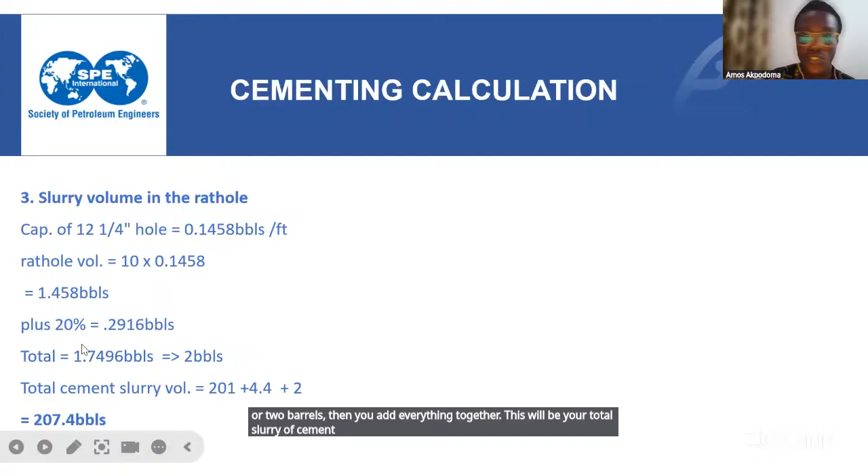And then you want to calculate for your rat hole. If you calculate for your rat hole, using the same formula, you also get your 2 barrels, then you add everything together. This will be your total slurry of cement that you are going to pump. So you already know the total volume of cement you will use for the operation you've designed. Now you need to know the amount — okay, this is mix water.

You need to know the amount of sacks of cement you are going to use. This is a formula for a class G cement with the density of 15.8. From all the calculations, you are supposed to get like 1,021 sacks of cement for the operation, as I said earlier, there's a standard for mixed water.

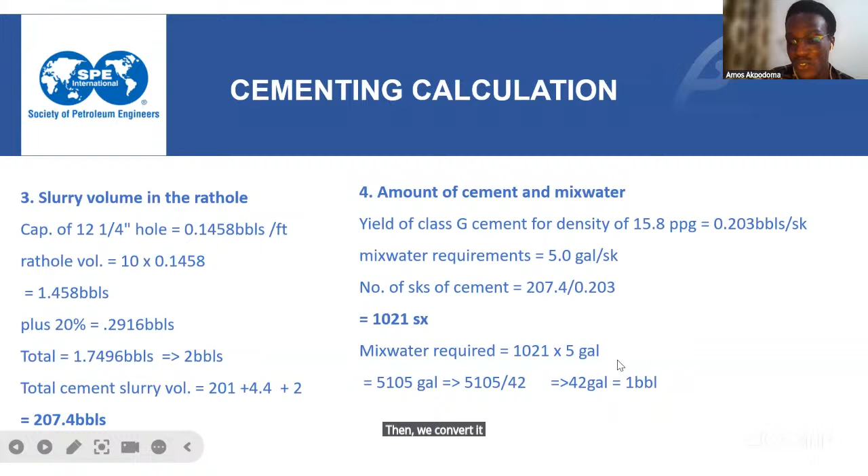We're going to use 5 gallons per every sack, so we're going to get something like 5,105 gallons of mixed water. Then we convert it to barrels, gallon to barrels. These are the conversion factors: 42 gallons make 1 barrel.

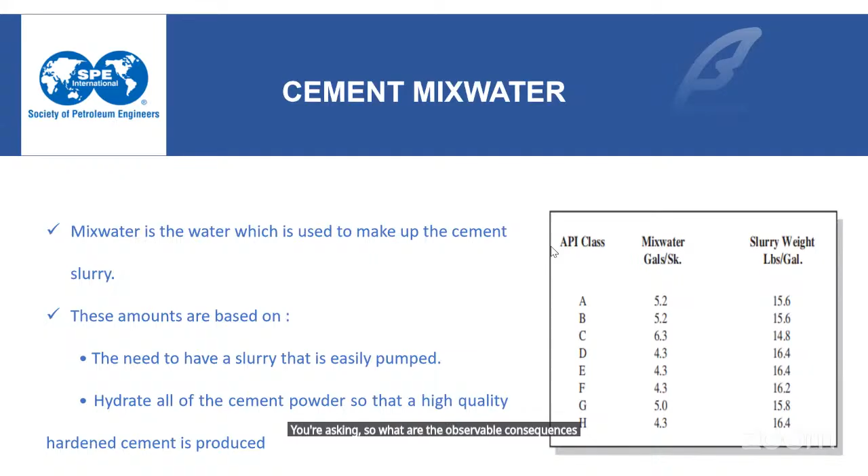And for your second question, let me check the question again, so I will answer it once and for all. You're asking, so what are the observable consequences of bad cementing in operations? Okay, let me show you the consequences of bad cementing in operation. All right, give me a minute.

So you don't want a poor cement job. There are some poor cement jobs that have easy remedies, but this is just the peak of it all for a poor cement job. Deepwater Horizon went down because of a poor cement job. I think that should answer your question.

Thank you so much, Mr. Amos. Felix, hope that answers your question. So the second question in the chat box is also from Felix, which says, what are the observable consequences of bad cementing in operations? I'm sure he must have answered your question in the first question, right, Mr. Amos? His answer is, I've answered that.